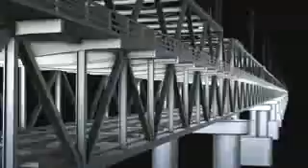But for any change to happen, you need a vision fueled by an ambition. Because everything happens twice, first in the mind and then in the world outside.

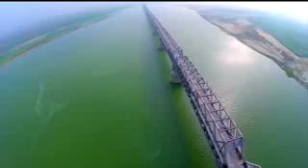The river Ganga, ancient, revered and sacred. Originating from the Himalayas, it reaches the plains, flowing merrily as it meanders its way through the Gangetic plains. By the time it reaches Bihar, the Ganges basin has extended to about 700,000 square kilometers, and the river becomes a wide giant that separates the state in two.

With passage of time, this divide has led to an unequal distribution of resources and opportunities in the state of Bihar. For economic potential to be tapped to the fullest, the need to bridge this divide has become critical.

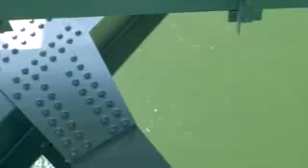IRCON was associated with this bridge in June 2008 when the Ministry of Railways awarded this work to IRCON, and since then there have been various developments over a time span of about 7 years, and now we are seeing the end of the work and commissioning of the railway line which is going to link the southern part of Bihar across the river Ganga to northern Bihar.

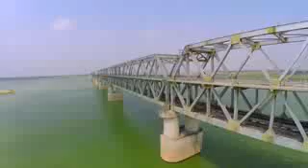36 spans of 123 meters along with 2 short spans of 64 meters each, with 2,200 tons of steel in each of these spans and 100,000 rivets. This is the longest and the heaviest superstructure on Indian Railways.

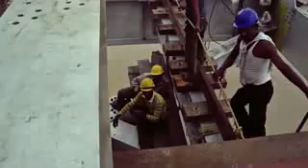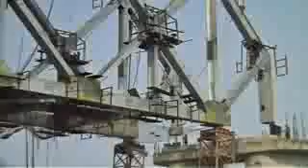The erection of the superstructure started in September 2010. Floodplains were reclaimed with boulders and earth filling to construct the first anchor span. And within a span of 4.5 years, all 36 spans of 80,000 metric tons of steel were mounted over River Ganga. This 4.56 kilometer bridge is Indian Railways' longest truss bridge.

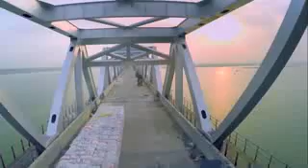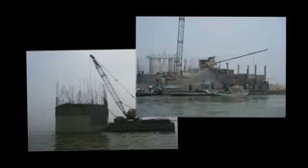The foundation laying had already begun in 2002. It was decided by the ministry to add a roadway above the railway track. By that time, the foundation and the substructure were already complete.

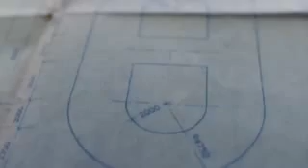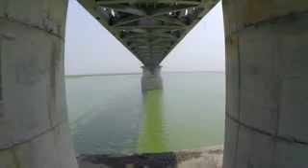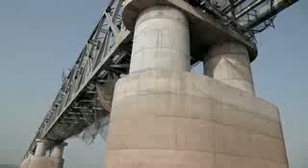This is the foundation portion, which is in the shape of a well, and the well is like this, the shape of double D. We have twin circular piers of outer diameter 5.5 meter, having concrete thickness of 0.8 meter. Now the founding level is -8, so the total depth is almost 60.5 meter, which is equivalent to a 17-story building.

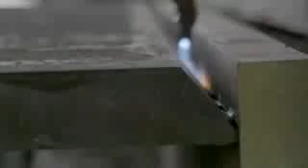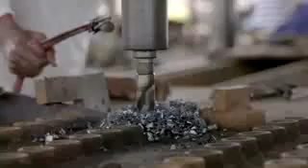To optimize the steel work, we had to go for a higher grade of steel, E450, so that the overall tonnage of the steel could be reduced and the dead weight of the superstructure could be reduced. But nonetheless, we had to use members as thick as 62 millimeters. Fabrication with 2.5-inch steel plate was itself a task. Special radial drills and guide jigs become essential when numerous identical drill holes are needed in large numbers. The drill needs to be precise and absolutely correct in position.

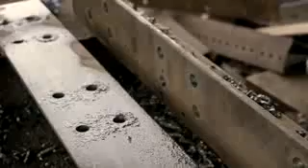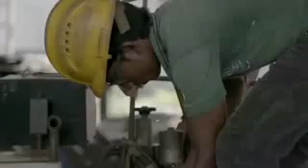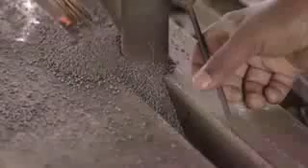Once drilled, these plates will become part of a bigger steel component of the bridge superstructure. Then, these plates are welded to form a member of the steel truss. A special welding technique, submerged arc welding, is being implemented. It involves formation of an arc between a continuously fed bare wire electrode and the workpiece. The process uses a flux to generate protective gases and to add alloying elements to the weld pool. When molten, the flux becomes conductive and provides a current path between the electrode and the workpiece.

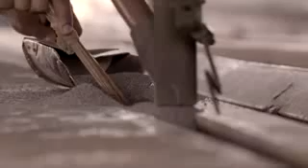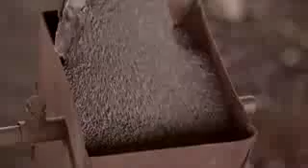The molten weld and the arc zone are submerged under a granular fusible flux consisting of lime, silica, manganese oxide, calcium fluoride and other compounds. This prevents any atmospheric contamination. Since the operator cannot observe the weld pool, great reliance must be placed on parameter setting and positioning of the filler wire. As the arc is completely covered by the flux layer, heat loss is low. There is no visible arc light, the welding is spatter-free, and there is no need for fume extraction.

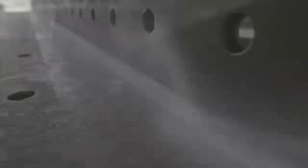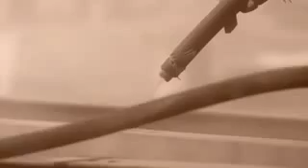Once the steel is welded, it is thoroughly checked for perfection by dye-penetrant testing. Here the white color shows the weld is seamless. The prefabricated steel components are then sandblasted and metallized. Sandblasting involves propelling very fine bits of sand at high velocity to clean the steel surface. Once sandblasted, the steel is metallized with a coat of aluminium. This will provide environment and corrosion protection to the steel for decades.

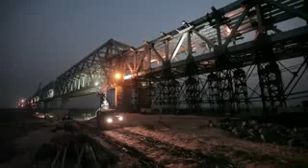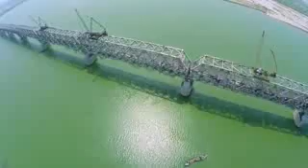The steel truss cantilever bridge was a major engineering breakthrough when first put into practice. It can span distances over 460 meters and can be more efficiently constructed at difficult locations by virtue of using little or no structural reinforcements. The construction begins with one span on ground. This serves as the anchor span for cantilever cranes mounted on top of the steel superstructure.

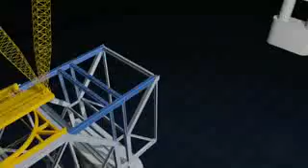Supported by a link member which holds the free end, these cranes build the next span member by member, launching ahead without any other propping from the ground. The cranes move on top, along the truss structure, adding one member at a time, forming an entire span from the free end, and land on the next pier.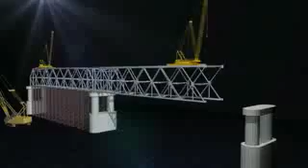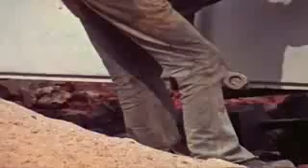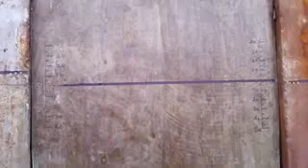Before cantilever launching of a new span, the bottom chord of the new span is blocked for any backward horizontal movement. It is done by inserting a buffer block between the bottom chord of the anchor span and the bottom chord of the new span. The vertical movement of the buffer block is monitored to assess the vertical deflection caused at the far end of the new span being launched.

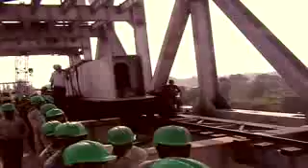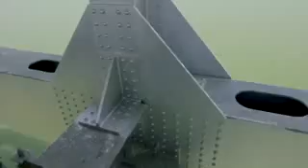For cantilever launching, the fabricated members were lifted to the rail level by ground cranes, then transported on temporary tracks. At the launch end, these members were lifted by cantilever cranes and fixed with drifts and bolts. On one single span of the superstructure, there are over 100,000 rivets.

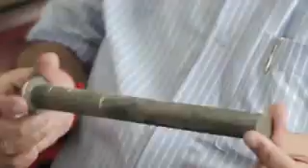A rivet is a permanent mechanical fastener. It is a smooth cylindrical iron shaft with a head on one end. The end opposite to the head is called the tail. It is heated and immediately placed in a drilled hole.

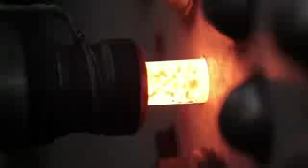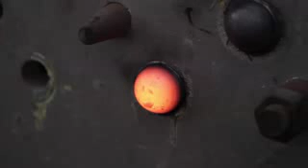And the red-hot tail is then pounded to form a new head. In other words, pounding creates a new head on the other end, resulting in a rivet that once cooled has fixed itself permanently on both ends. These rivets hold the steel components fastened together permanently.

In order to accomplish the task more efficiently, the engineers started construction from both sides and had plans to open a third front. But the forces of nature had something else in store for them. This island, before 2013 floods, protruded beyond this 11th span of the bridge, up to say 100 meters on the downstream side. And suddenly, in the floods of 2013, this got washed out. It was a very big challenge for us. Then how to continue with our ambitious plan of a third front?

And then we thought of a bigger barge. We brought a big barge of 1200 metric ton capacity, which carried material from the shore on the north end to the place of erection, and the entire material was lifted from the cantilever crane right from the barge, and erection was continued.

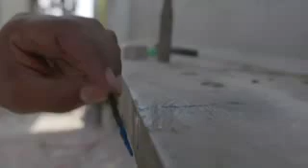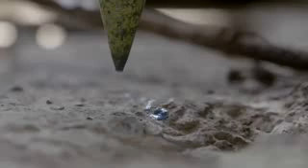And if the alignment of the truss does not match the central alignment of the bridge, the entire 2,240 metric ton truss will have to be shifted into alignment.

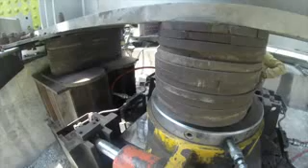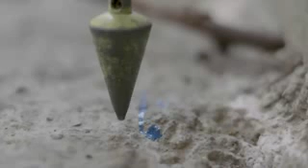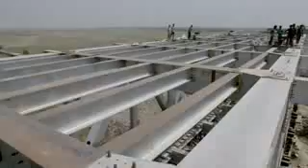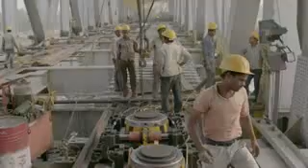To build a road deck on the second level of the steel structure, the engineers had an unprecedented challenge. The concrete casting could have been done by providing traditional support reinforcements from the rail level below. But the engineers had to find a way that would not hinder the railway work and accomplish both tasks simultaneously without affecting the other. Generally, we use props from ground, and using props from ground would have hindered the work. So we devised a method which does not use the support system.

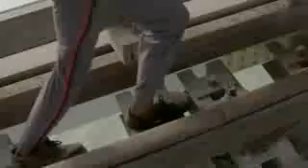As you can see here, there is a gantry, and behind me again there is a system which is independent of support from ground. So they developed a gantry that runs on the rails and holds aloft a large steel shutter that provides the support needed for the road construction above.

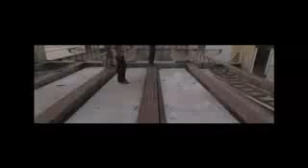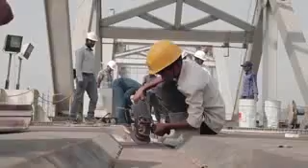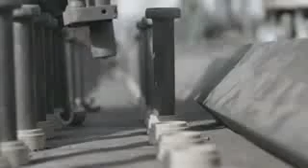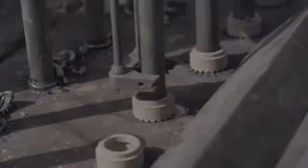On the deck, the shutter is fixed and the team is welding shear studs into the steel structure. These shear studs prevent the slip between concrete and steel structure and help achieve a much stronger bond. Shear studs transfer and balance the stress between steel and concrete in a composite structure.

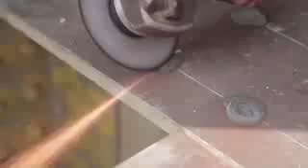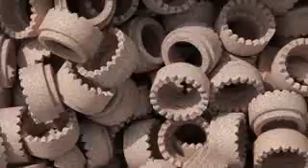Stud location and straightness of alignment of row over the steel cross girder and road stringers is marked with precision and care. Surface around welding location is cleaned by buffing wheel and made free from rust, dust and paint. The stud welding gun uses a type of flux called ferrule, a ceramic ring, which concentrates the heat, prevents oxidation and retains the molten metal in the weld zone. The ring is then broken and removed.

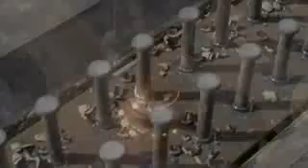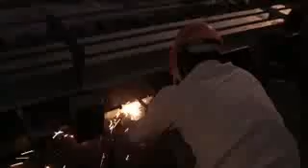An expansion joint is an assembly designed to safely absorb the heat-induced expansion and contraction of construction materials. It absorbs vibrations, it holds parts together and allows movement due to ground settlement or earthquakes. This joint greatly reduces the stress that would otherwise be caused to the main structure.

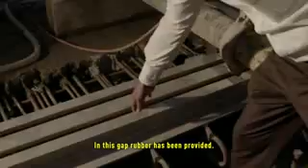The first anchor span was erected on trestles in September 2010, initiating cantilever erection from the southern end.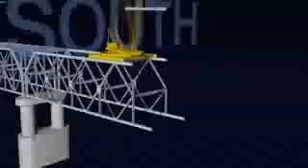While on the north side, the erection began in January 2011. Taking advantage of the dry weather, additional anchor spans were built wherever there was ground support. Even midstream, the span number 27 had a patch of land underneath, adding a third front for the cantilever erection.

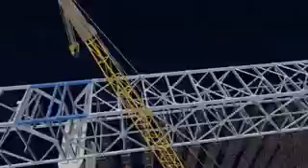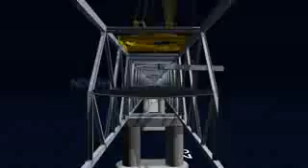But in 2013 floods, the land got washed away, so a floating barge was used to feed the material for midstream cantilever erection. This expedited the progress, and within 4.5 years, the erection of superstructure was complete. On 2nd of January 2015, when a bottom chord member was placed to bridge the last gap, the link between north and south was finally established.

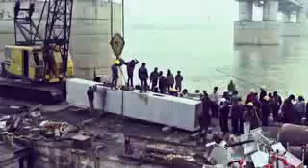Such kind of structures are not built daily or annually or every decade. Such kind of bridge may be a once in a lifetime construction, and I am fortunate that I have been associated with this bridge. Not many engineers will get a chance to be associated with such kind of a mega bridge construction.

From technical point of view also, it is a feather in the cap of Indian Railways. It is the longest rail-cum-road bridge in the country at 4.5 kilometers. Most of the fabrication is welded, and there is as much as 200 kilometers of welding which has been done for the bridge, and at joints we have provided rivets totaling almost 4 million. So these are all big achievements.

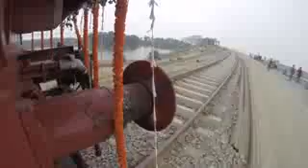Connectivity is the key to economic prosperity. When human resource is mobilized, unprecedented growth can be actualized. Job opportunities, agricultural exchange, tourism, increased productivity and efficiency are some of the immediate gains the bridge will deliver.

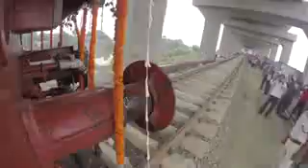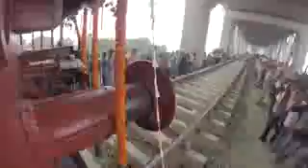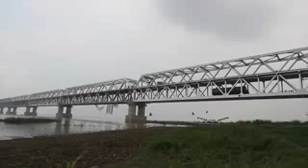However, homogeneous growth, decongestion of urban areas, and increased participation of villages to Bihar's economic growth will be the key long-term impact of this initiative. Bihar stands on a threshold of a dynamic phase for growth and development. This bridge over Ganges, connecting Patna with Sonepur, will be a turning point for Bihar.